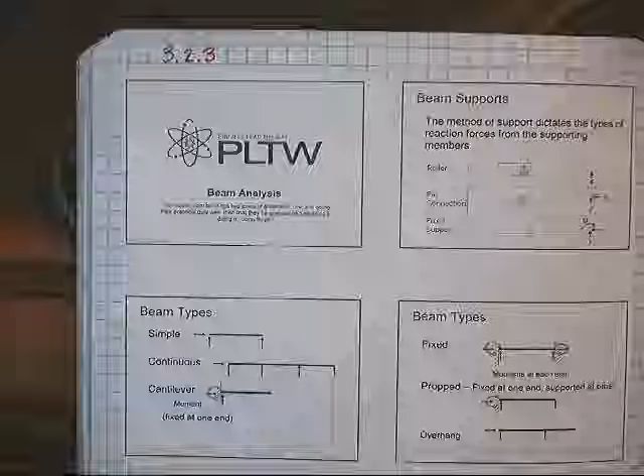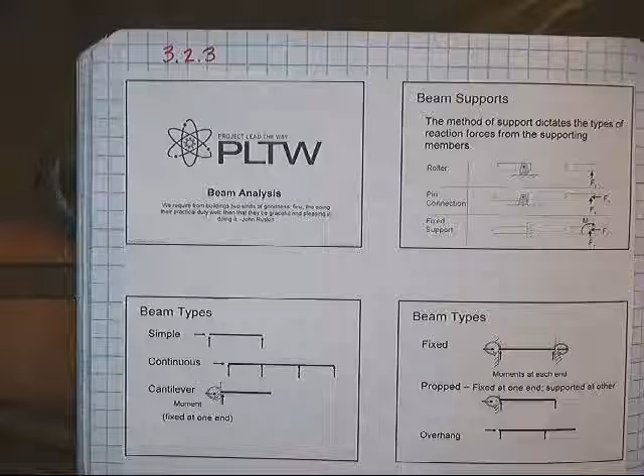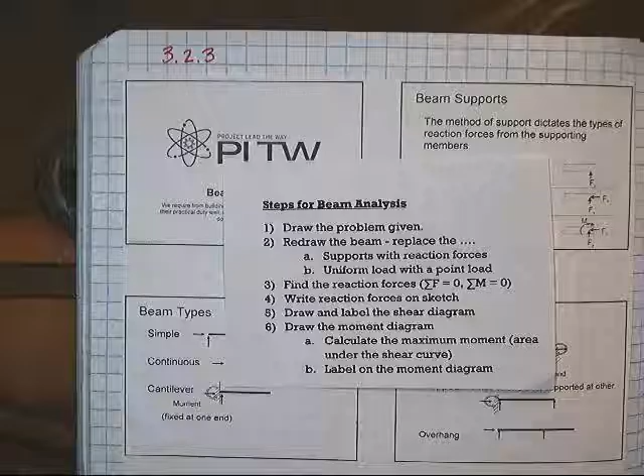Okay, we're going to continue with our beam analysis. This is going to be our PowerPoint part 2. And you should have already watched part 1 and taken notes and glued this page of notes into your notebook. You should also have gotten the steps for beam analysis, and these are the steps we're going to be using to work each of these problems.

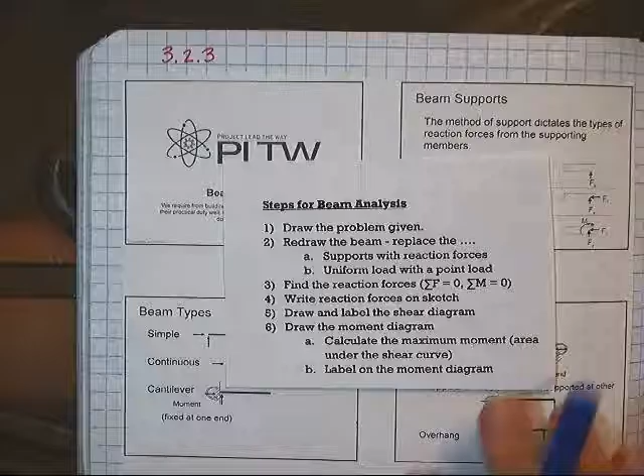It's kind of like the last thing we did, where there's a lot of steps involved, but none of the steps are hard. You just need to do all the steps. So here's the first problem we're going to do. It is a simple beam with a pinned support on one end and a roller support on the other. We have a single point load that's 1,000 pounds, and it's 8 foot from this end and 12 foot from this end. So step 1, draw the problem given. So pause the video, copy this problem down.

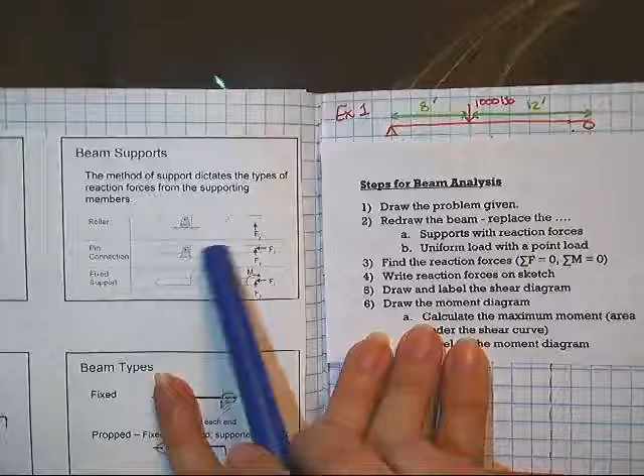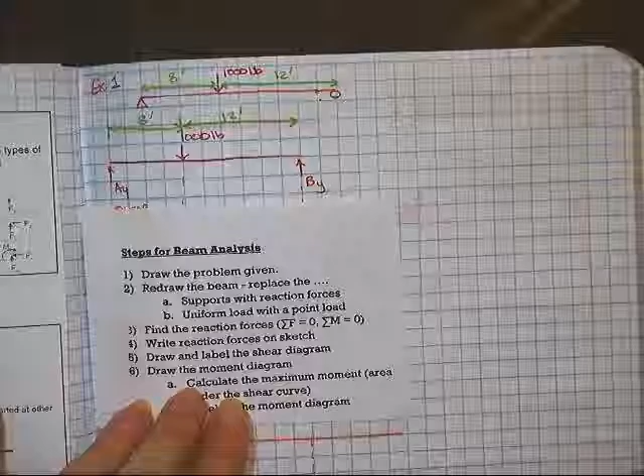Okay. Step 2 is redraw the beam and replace the supports with the reaction forces. Well, that is exactly what we had over here. Our pin support we're going to replace with a vertical and horizontal, and our roller we're going to replace with just a vertical. So I've done that on my problem here. The only one I haven't drawn in is the AX. We talked about this in the first part of the video, but I'll remind you of why that one is going to be 0. So this is step 2, redraw it, replacing it with the reaction forces at the joints.

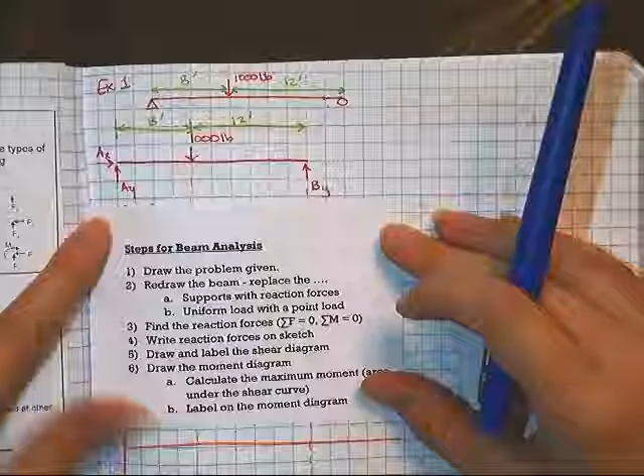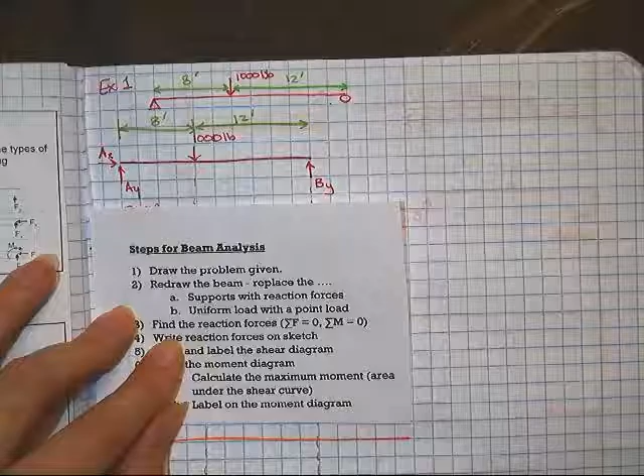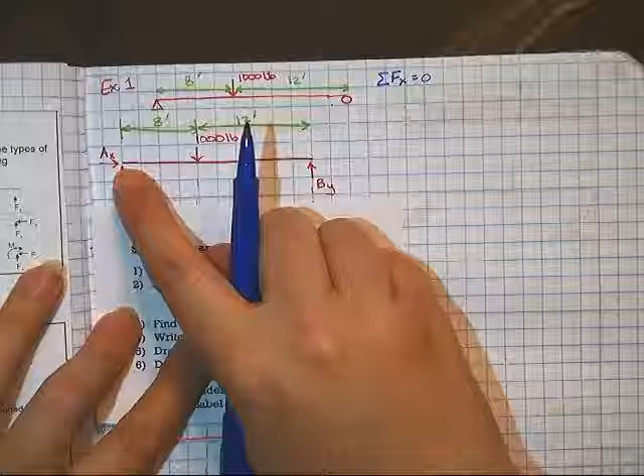The other part of step 2 is replacing a uniform load with a point load, but we don't have any uniform load here, so we're good for that. Now we're going to come over to the side and find the reaction forces using the sum of the forces equals 0 and the sum of the moments equals 0. So I'm going to start with the sum of the forces in the x direction equals 0. So we're looking for anything happening horizontally. Well, in this case, the only thing happening horizontally is AX. So AX equals 0. So this reaction force is just going to be 0.

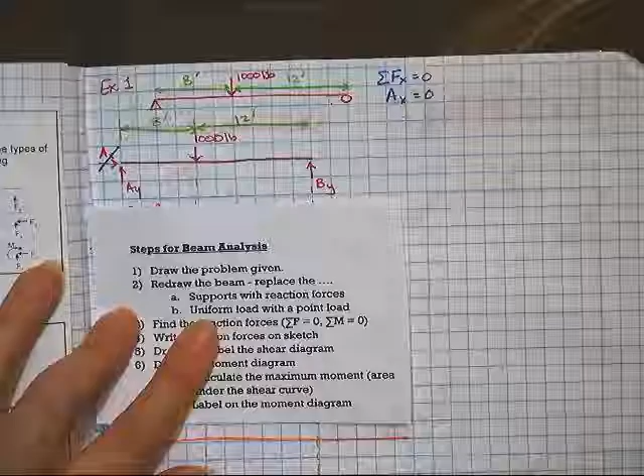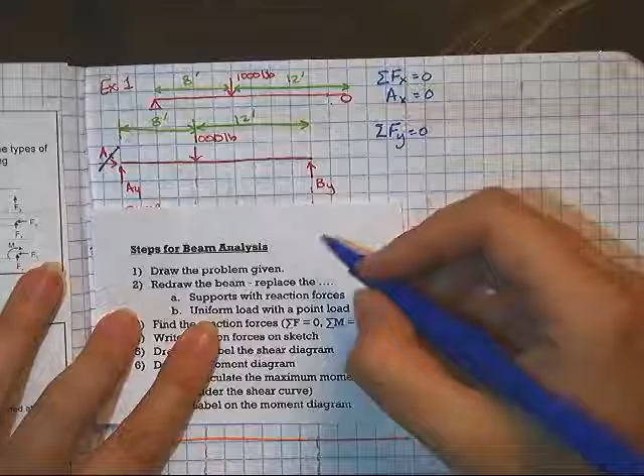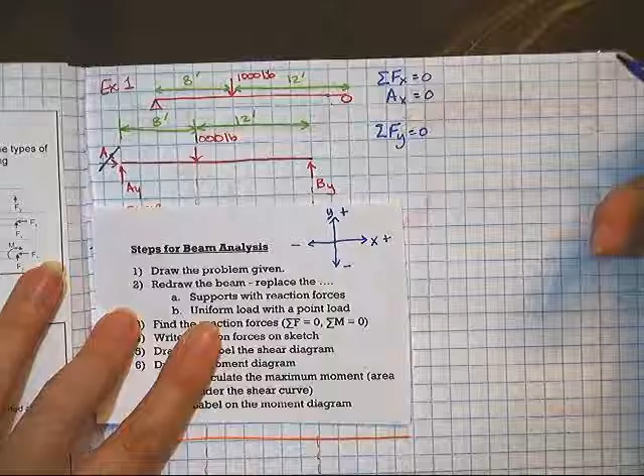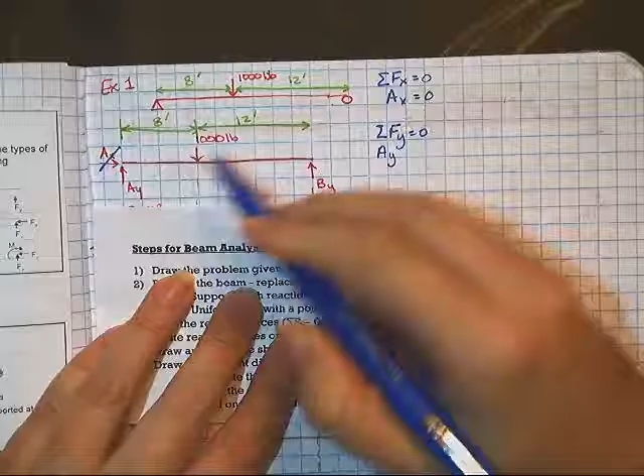This is going to be true for all our problems unless we had some kind of horizontal forces acting. I'm also going to do the sum of the forces in the y direction equals 0. And we're going to use a standard XY coordinate system where this direction for x is positive, this direction is negative, for y, up is positive, and down is negative. So my AY is going up, so AY is positive. BY is going up, and that's going to be positive. And then 1,000 is going down, so that's going to be negative. So I did a sum of all of my forces in the vertical direction, and those should add up to 0. Well, if I add this part to the other side using algebra, I get AY plus BY equals 1,000.

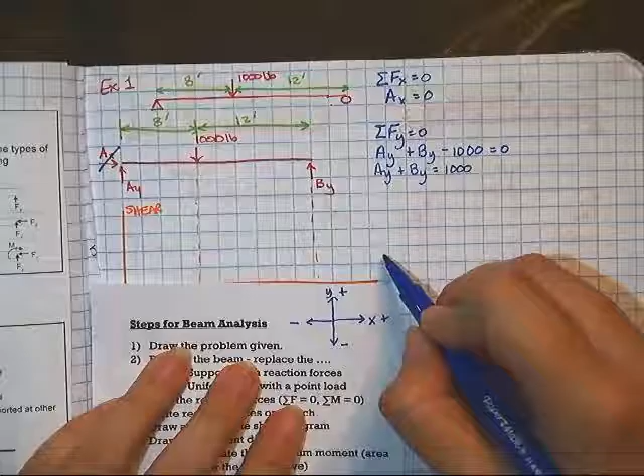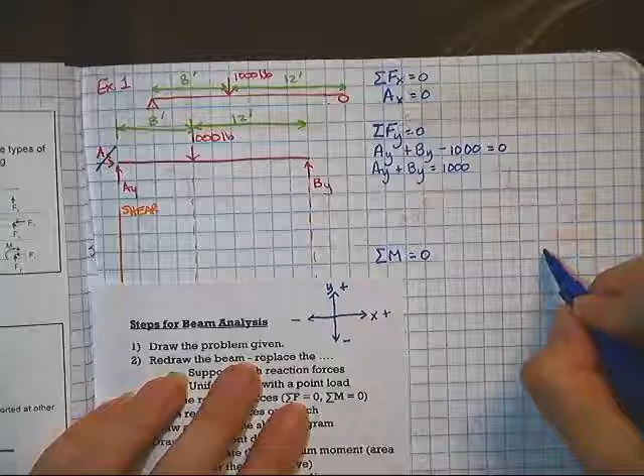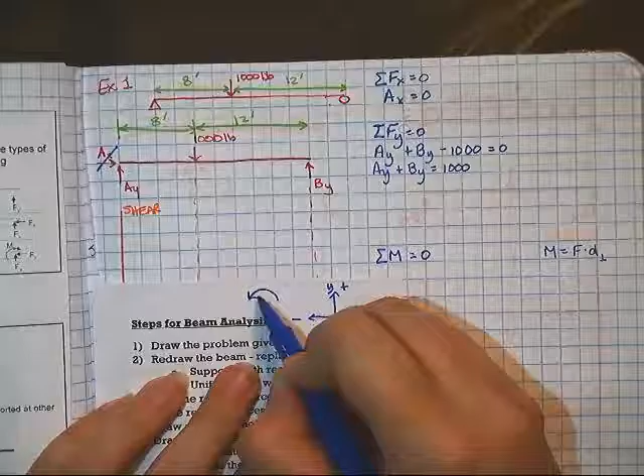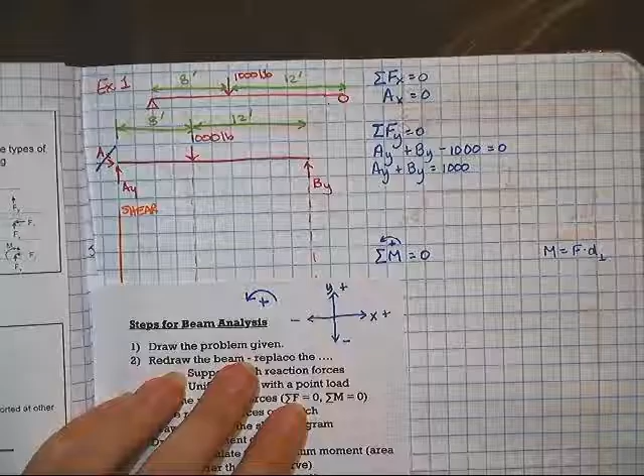Now, if you remember from Algebra 1, one equation, 2 unknowns, I can't solve for that. So I'm going to come farther down. I'm going to skip some space, and I want to leave some space because I'm going to have to come back to this. And I'm going to do the sum of the moments equals 0. So we need to speak a minute about moments. Moments, we said, were force times distance. We said that in the first part of this video. And something else you need to know is that we consider counterclockwise moments to be positive. So what I like to do is whenever I have one of these problems, I just write that right above it, which reminds me that anything going in the counterclockwise direction is going to be positive.

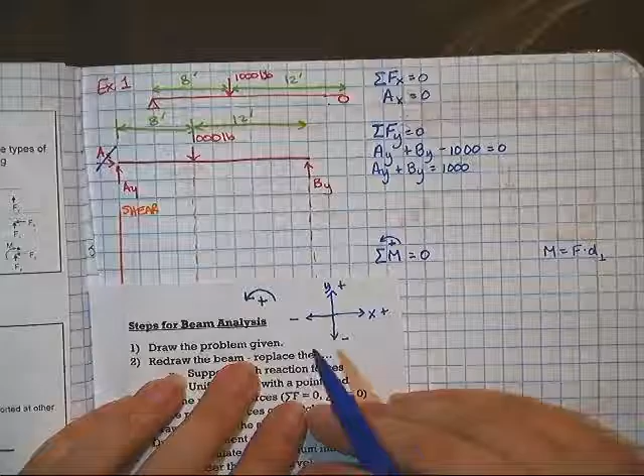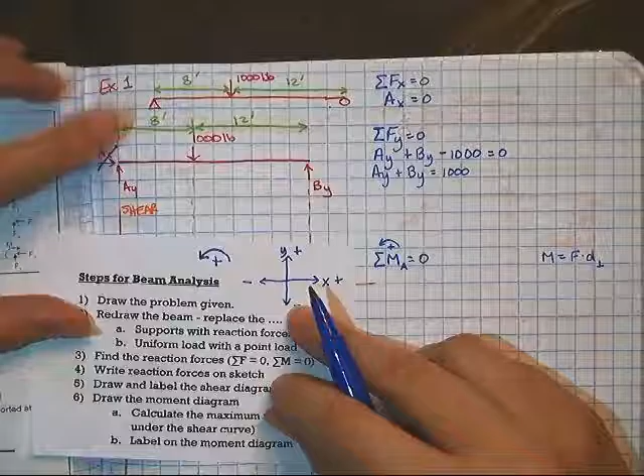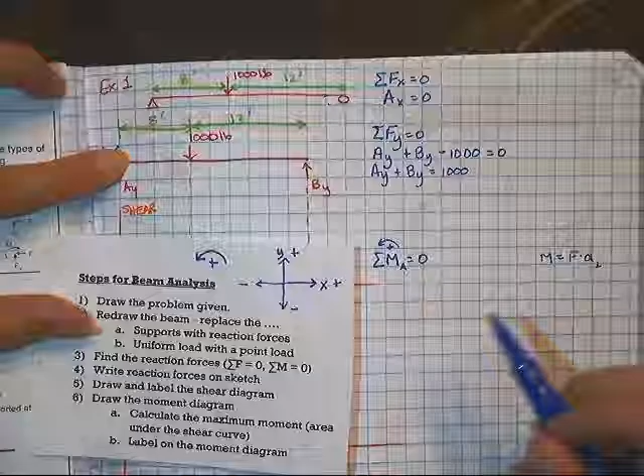So a moment is where something is bending. So I have to decide where my pivot point is. I always put it where my pin joint was. That just seems to make it the easiest. So I'm going to pin it right here. So I'm going to do the sum of the moments at A. In this case, AY has 0 distance away from where I'm pinning it. So its moment there is going to be 0. It also should kind of make sense if I'm holding it down right here and then I push right there, that's not going to cause this to turn. So we don't worry about the one where we're holding it down.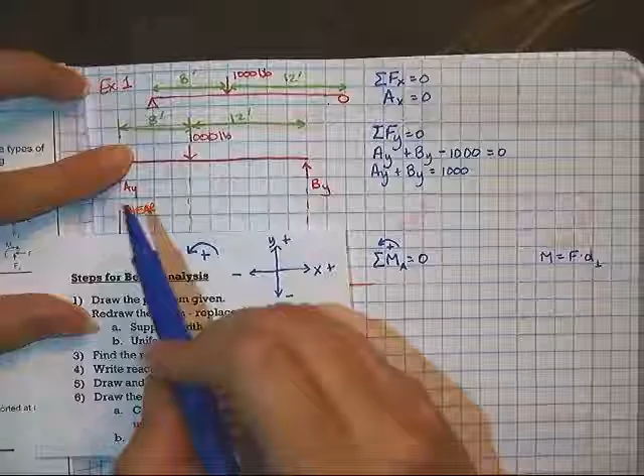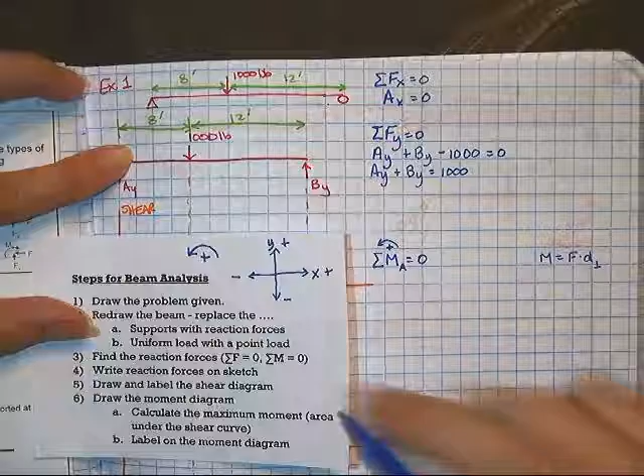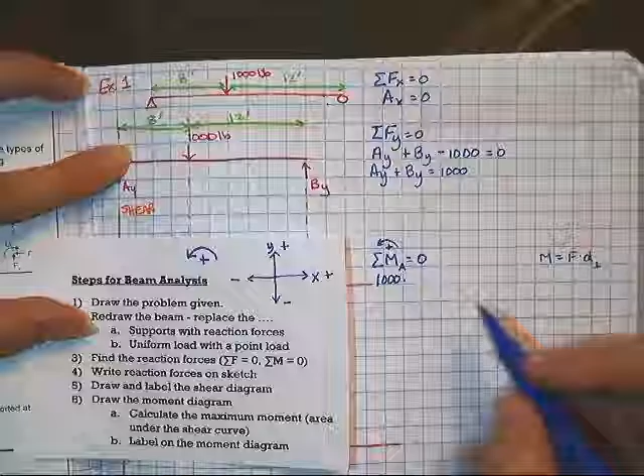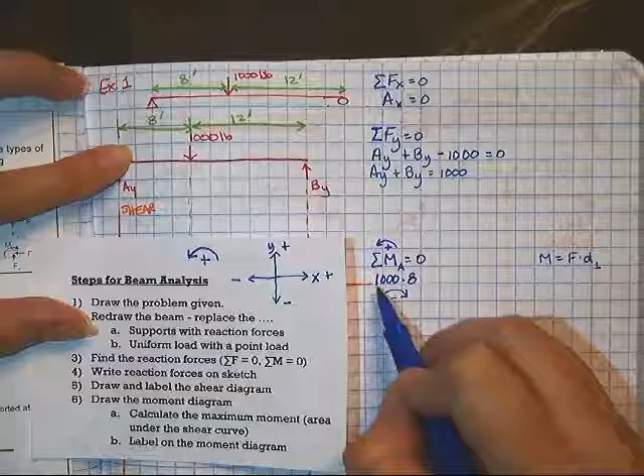The first one that's going to cause a turn is this 1,000 pounds right here. If I push down right here, like this, it's going to cause this to swing this direction. So I've got my force is 1,000, and my horizontal distance there is 8 foot. And if I push this way, that's going to cause this one to go this direction, which makes it a negative. So I'm going to put a negative on it. My next force that's going to make a difference is my BY. It's pushing up, so I have a force of BY, a distance of 20.

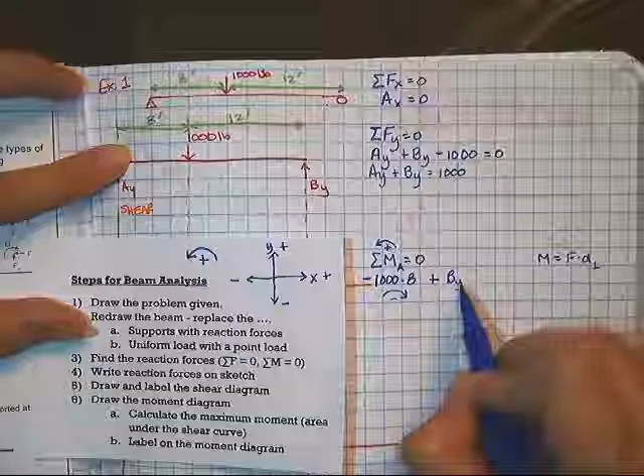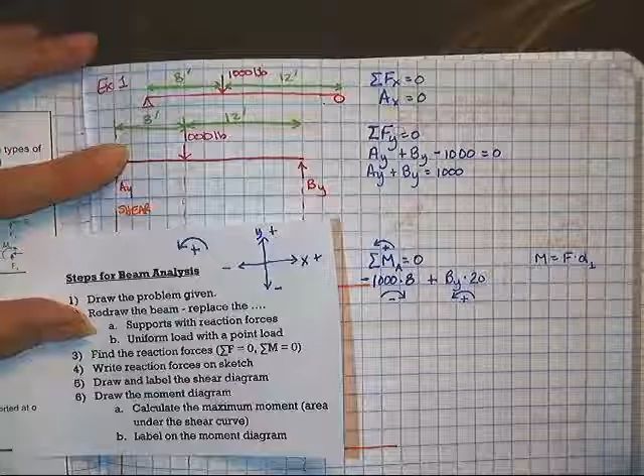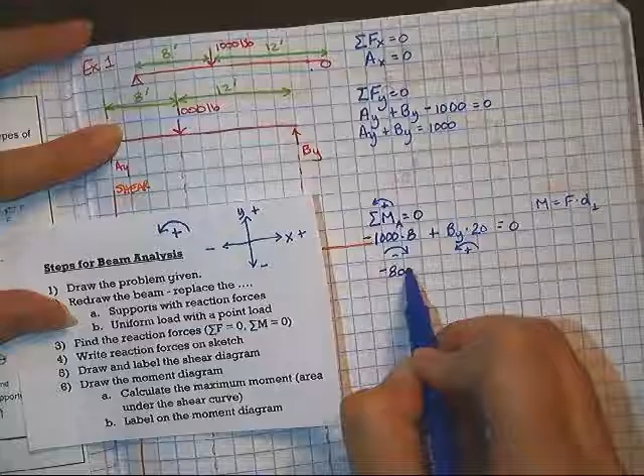And if I push up here, it's going to cause this one to rotate this direction. That makes that one a positive. Okay, that's all my moments, so the sum of that is going to be 0. Now I'm just going to use some algebra here. 1,000 times 8, that's negative 8,000, plus 20 By equals 0. Now this is just a regular Algebra 1 problem.

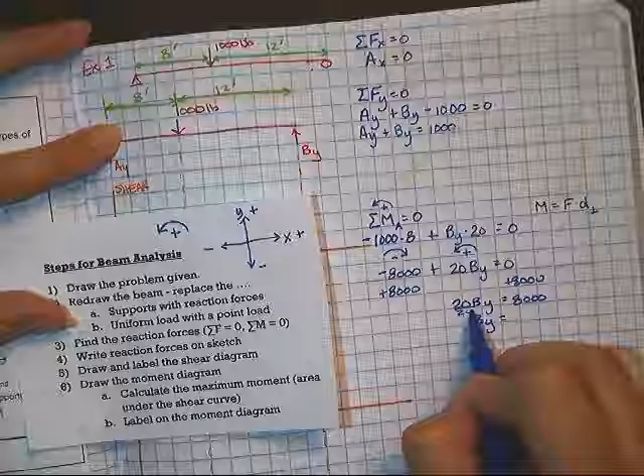Plus 8,000, 20 By equals 8,000. By equals, divide both sides by 20, By equals 400 pounds.

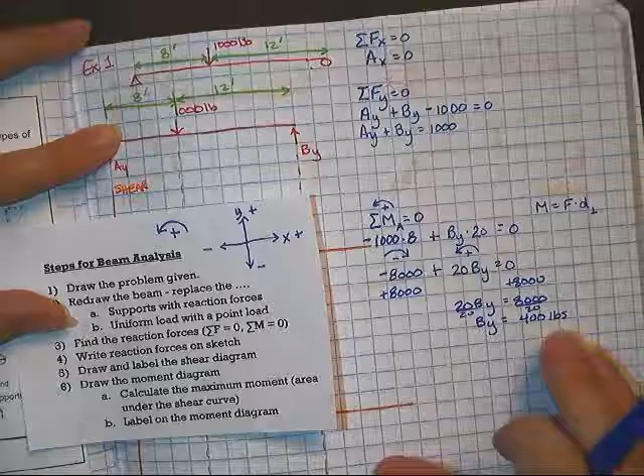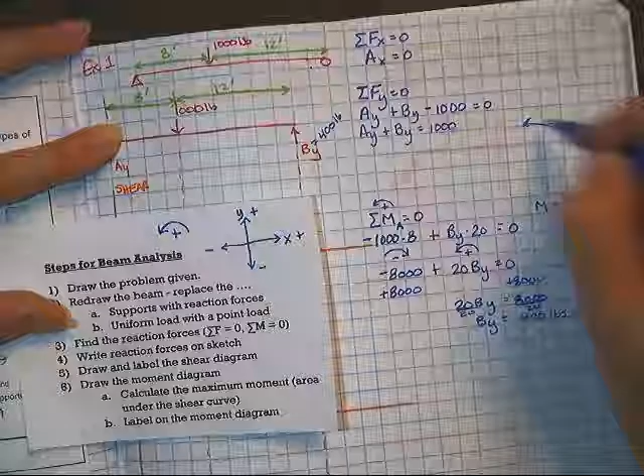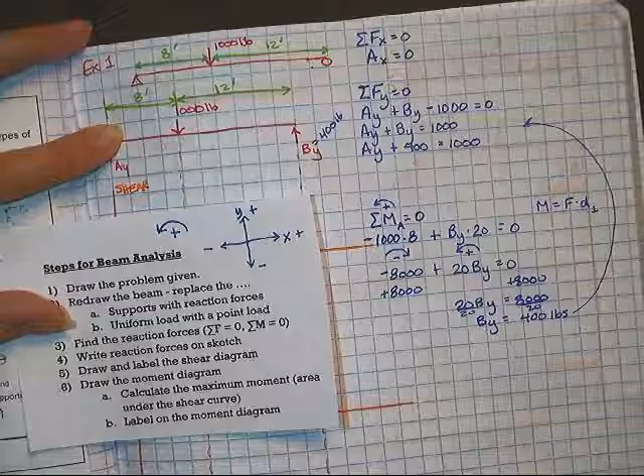So I'm going to put this in two places. One, I'm going to put it on my diagram here. I know By is 400 pounds. And then I'm also going to take this and plug it in up here for By. So when I do that, I get Ay plus 400 equals 1,000. Now I've got one equation, one variable, so I can minus the 400. And I get Ay equals 600 pounds.

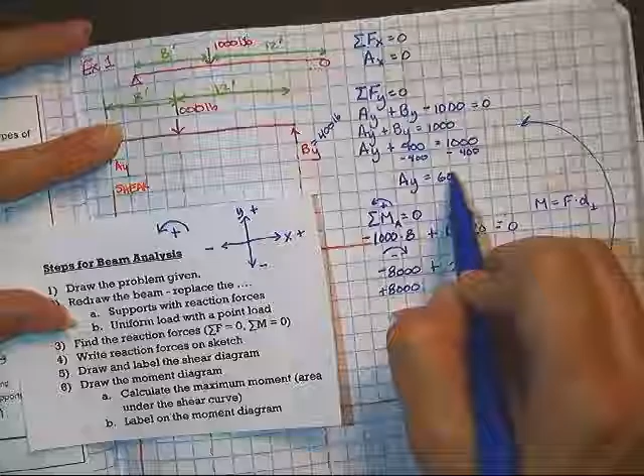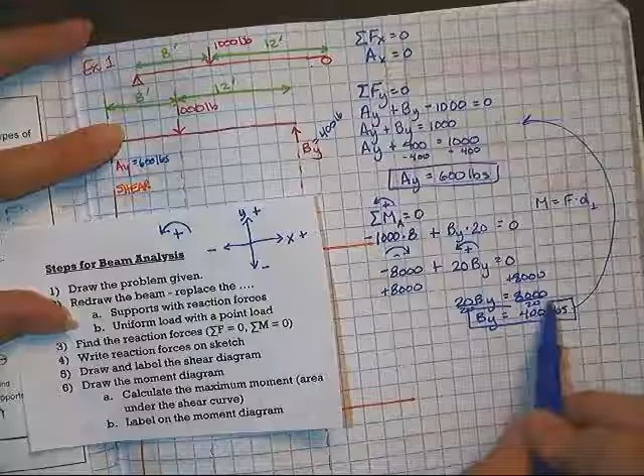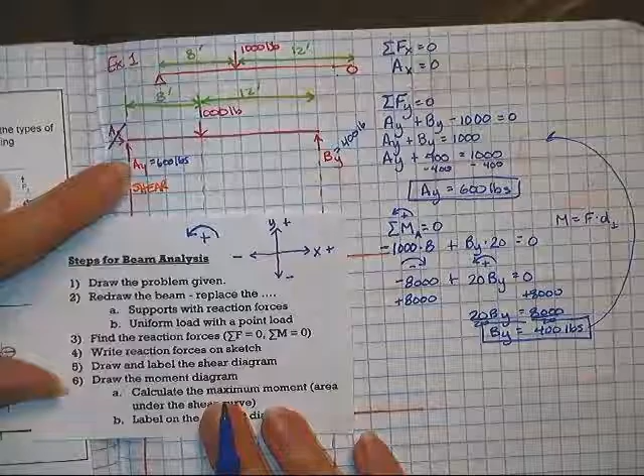And I can put it over here. I'm going to go through and put a little box around each of my answers so I can find them if I need to later go back and look at them. Okay, so this is part 3. Find the reaction forces, and part 4, write the reaction forces on the sketches. I did that. Now part 5 is draw and label the shear diagram.

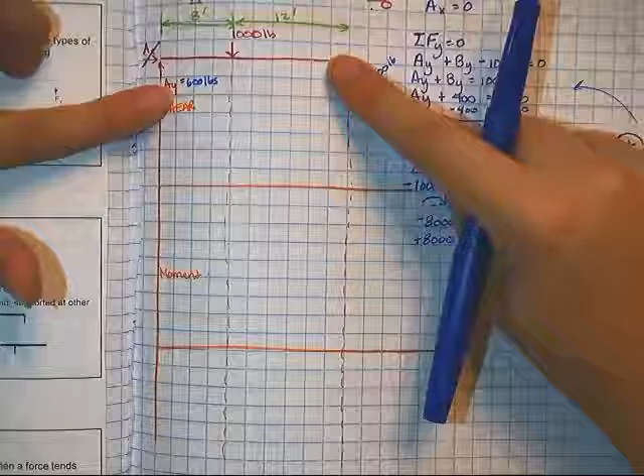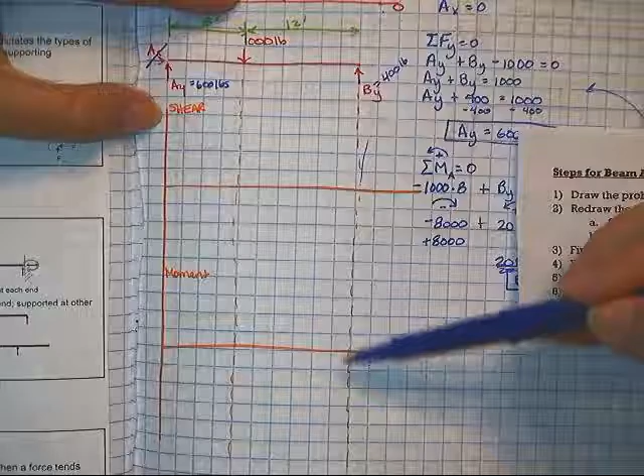So what you want to do is directly below, here's my diagram I'm working from, and directly below it I'm going to draw my shear and moment diagrams. I've got my vertical axis and my horizontal axis. I've also come through, I put my vertical axis right in line with the end of this one, and I've also come through and put a little dashed line where this force is and where this reaction force is. Those are going to help me out when I'm doing my next sketching.

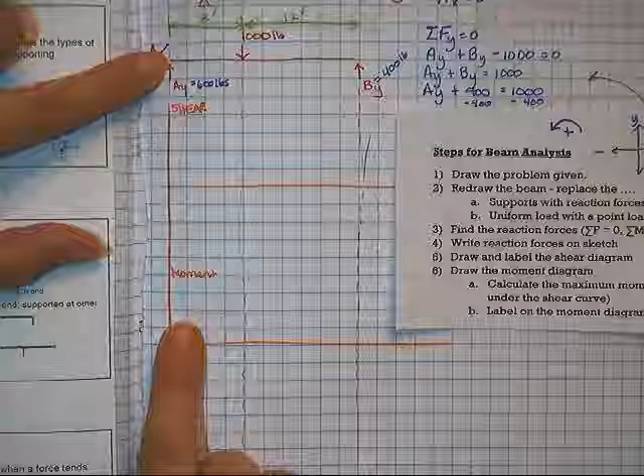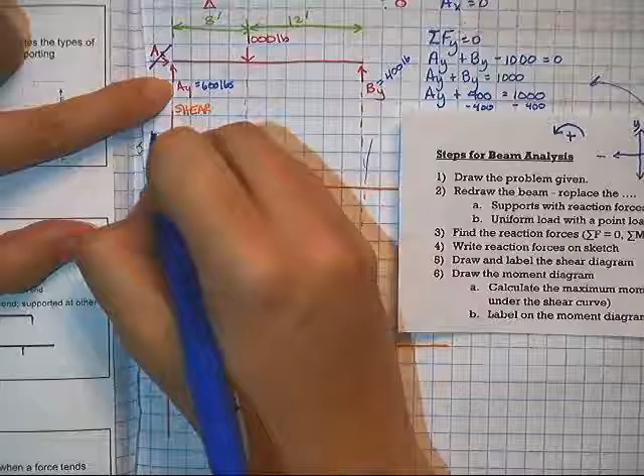So for the shear diagram, we're talking about linear forces. So what you do is you start on this end and you say, what linear force is acting on it right here? Well, I have a linear force of 600 pounds going up. So from my central axis here for shear, I go up 600 pounds, and that's where my diagram is going to start. And I work across my beam this way, and I say, well, what force does it still feel here? Well, right here, it's still only feeling this reaction force going up. Right here, still only this one force going up. Only this force going up, only this force going up, all the way till I get to this point. So my shear diagram is straight across like that.

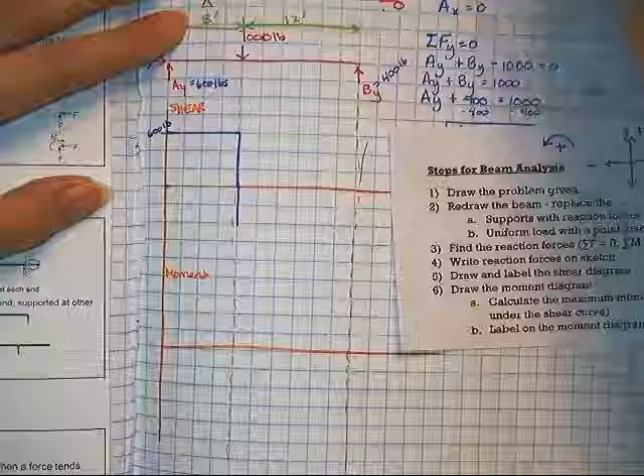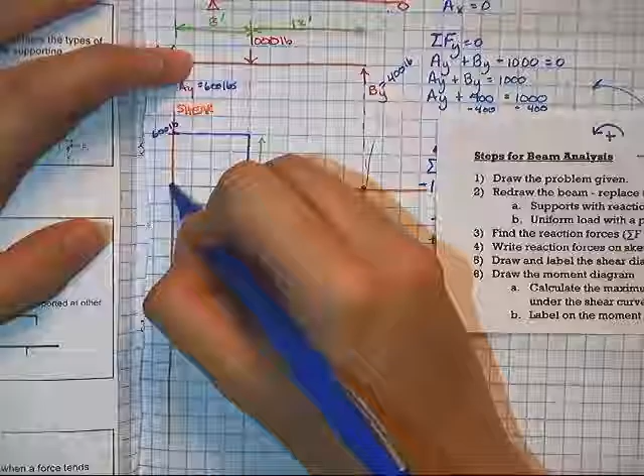Now I have this force going straight down by 1,000. Well, if I go down this much, that's 600 down, and I want to go 1,000 down. So from there, I'm going to go this drop from here to here is the 1,000 pounds that I had right there. Now going across here, it's steady all the way till I get to the end here. And at this point, I have a force of 400 going back up. So this distance right here is 400. I should start and end with my two reaction forces. That's the shear diagram. That's all there is to it.

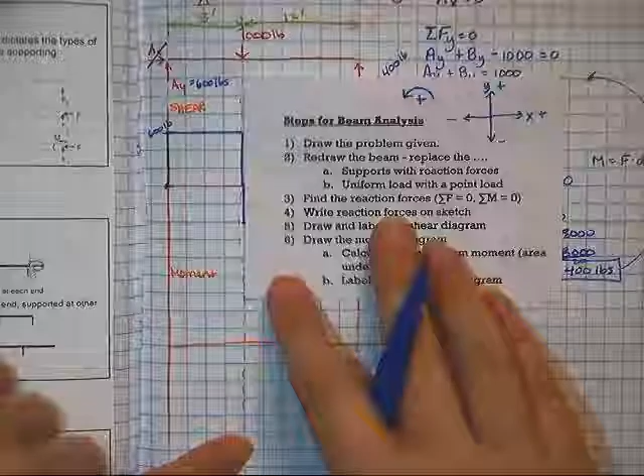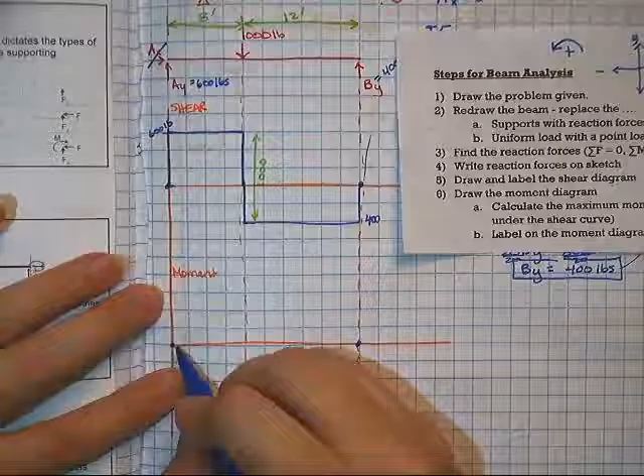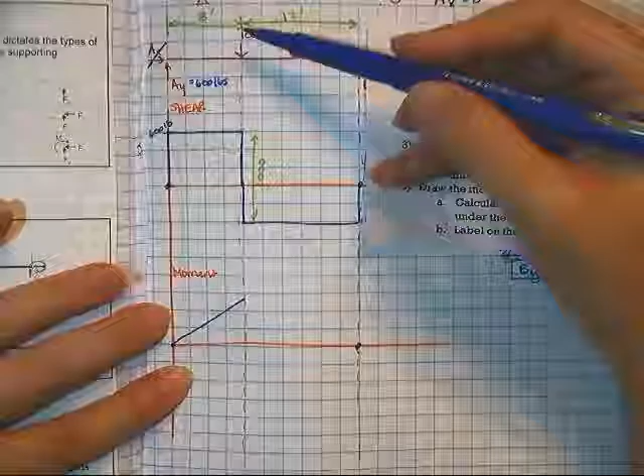Now we're going to do the moment diagram. That's part 6. Draw the moment diagram. The moment diagram is always going to be 0 at the ends. So I know I'm going to be 0 here, and I'm going to be 0 at this end. If I have a point load, I'm going to have a linear moment diagram. And it's going to go up and then linear down. I'll show you what happens with a uniform load in a minute. So what it's going to do is it's going to go from here up to where this point load happens, and then it's going to come back down. Now, how high this point is what we're going to do when we calculate the maximum moment.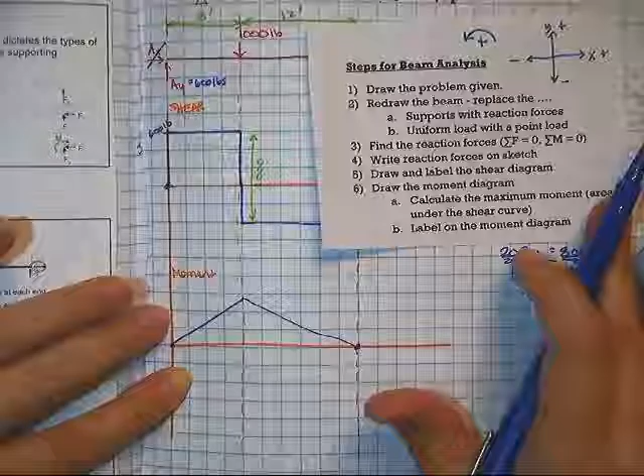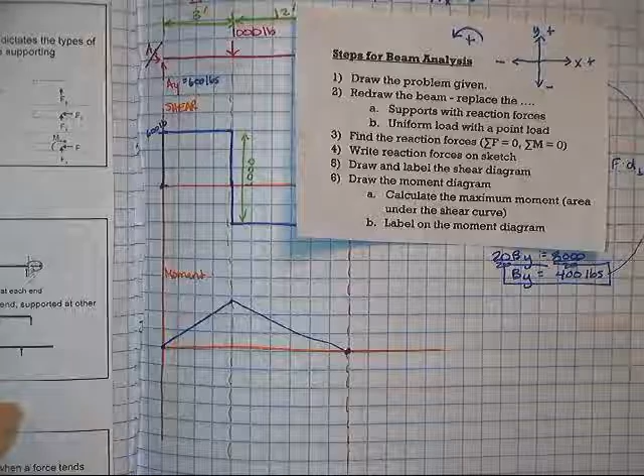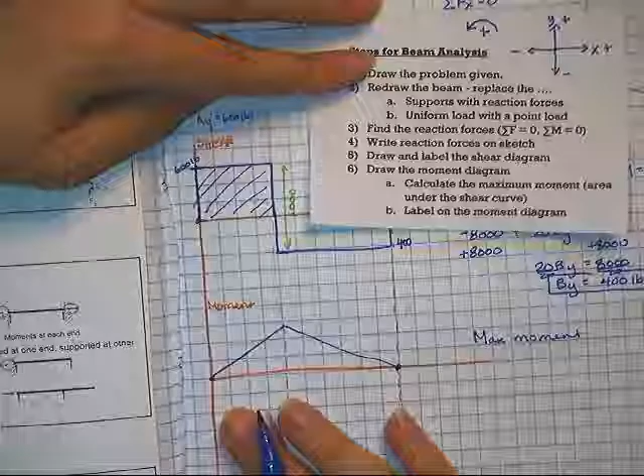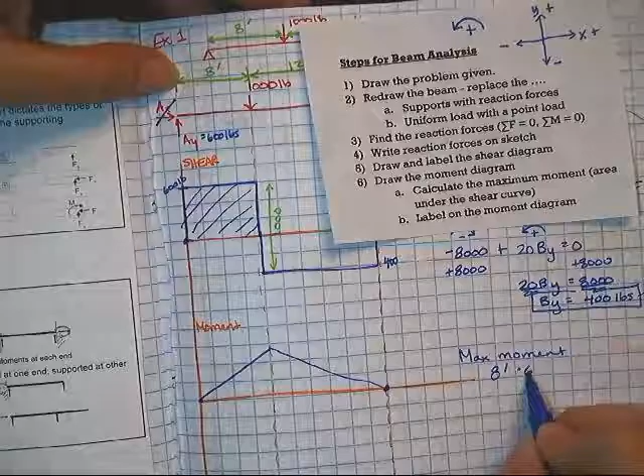And to calculate the maximum moment, it's the area under the shear curve. This actually works out to be a little calculus, which many of you maybe haven't had calculus yet, but that's why we calculate the area under the shear curve. So I'm going to look at the area under the shear curve under 1/2 of it. So I'm going to look at this area right here. Max moment. Well, the area under this, it's a rectangle, so it's just length times width. Well, the length of this is in feet. That's 8 feet. And the height of it is the 600 pounds. 8 feet times 600 pounds is 4,800 foot-pounds.

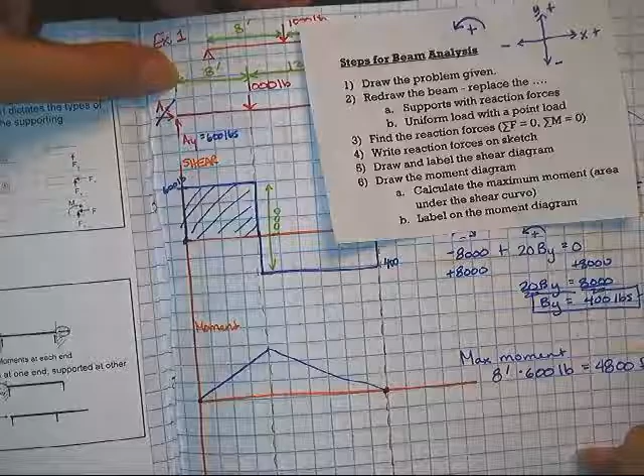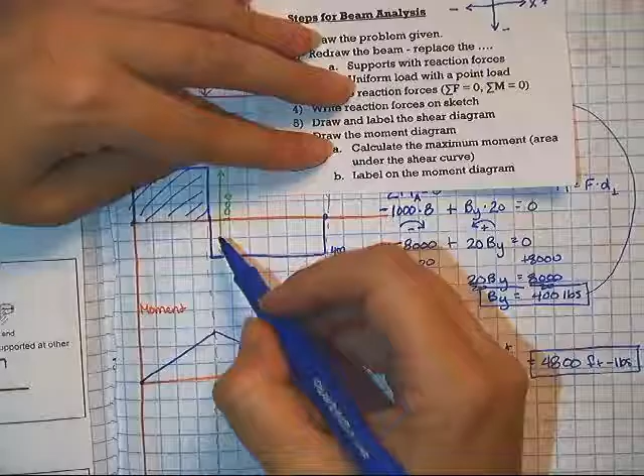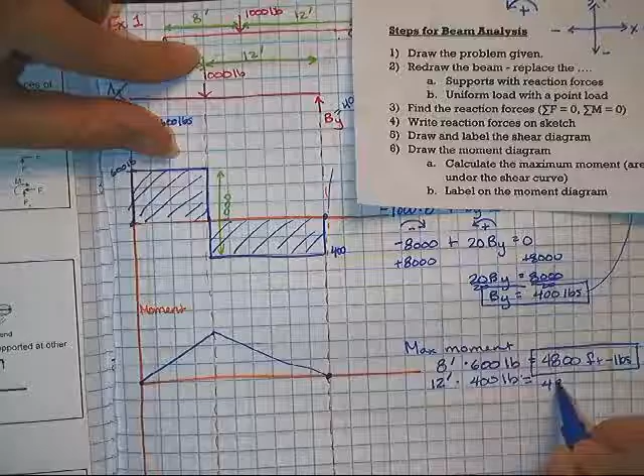Now you might ask, well, how did I know I needed to use this side and not that side? Well, let's calculate it for this side over here and see what we get. So we're going to calculate this one. This one happens to be 12 foot long, and its height is 400 pounds. And look, we still get 4,800. So the answer here is it doesn't matter which side I calculate, I'm going to get the same answer. We'll see on another problem where it's easier to do one side than the other.

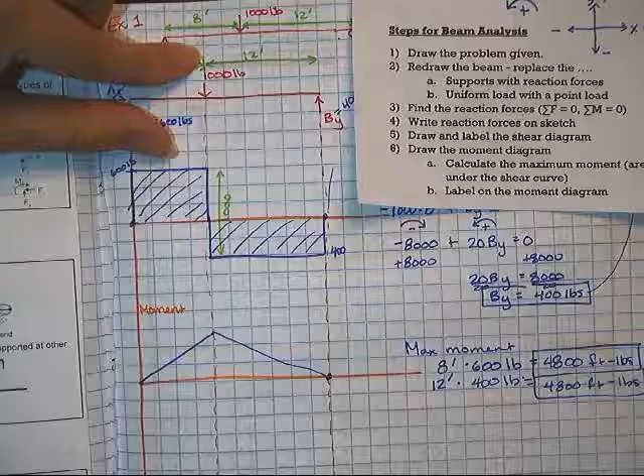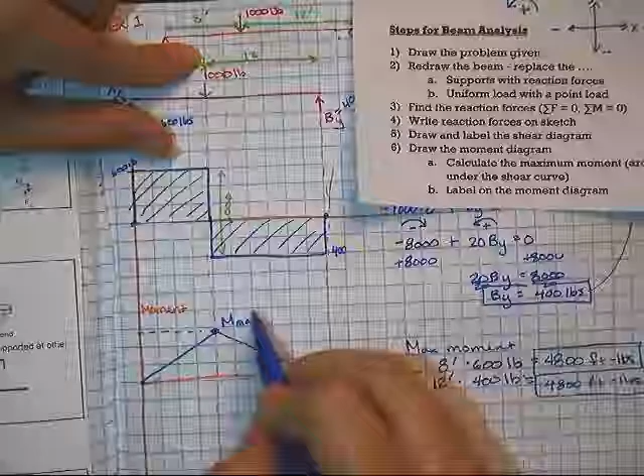So my max moment, this height right here, and we write that as M max for max moment, is equal to 4,800 foot-pounds. All right, that's all there is to this.